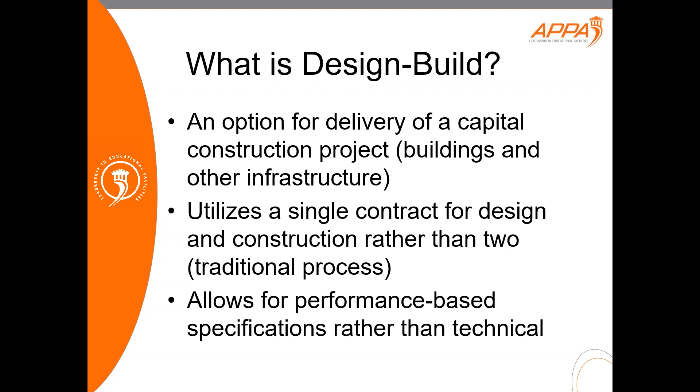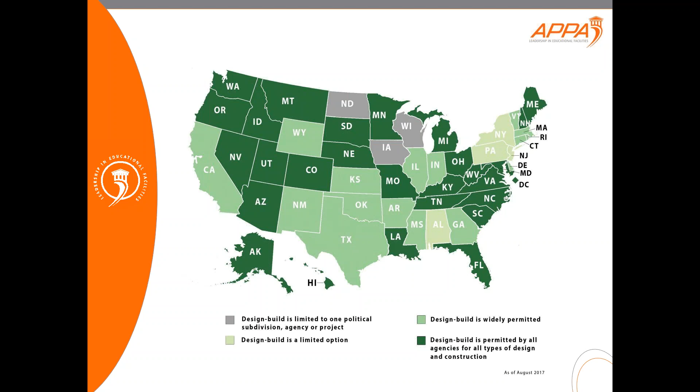And as the color green gets darker, use of design build to construct a project at your campus becomes better. If you're at a private institution, it doesn't matter what these colors are. You can do whatever you feel like doing because you're a private entity. But for public entities, you need to be somewhat aware of what your state allows you to do for contracting.

So the first question: how many project delivery methods do you think there are? I've mentioned design, bid, build already, which is the traditional method where the owner hires an architect or engineer to design something, and then they take the final design and bid it out to a group of contractors. Or, if it's a private entity, they may go to a favorite contractor, or they may negotiate the price. Then a contract is signed with the contractor to construct the facility that has been previously designed.

A variation on that is construction management agency. You may still have a separate designer, and in this case, you hire a construction manager who would then be in charge of finding contractors or subcontractors to construct the designed facility. In some cases the construction manager participates during the design phase, but that's not a requirement.

A variation on that is construction management at risk. Again, the construction manager may be involved during the design stage and have some input in the design, but there's still a separate contract with the construction manager. When they're at risk, they have a little bit more responsibility for making sure the project gets done the right way, very similar to design-bid-build. The project is designed completely by the designer, and then the construction manager takes over and constructs the facility.

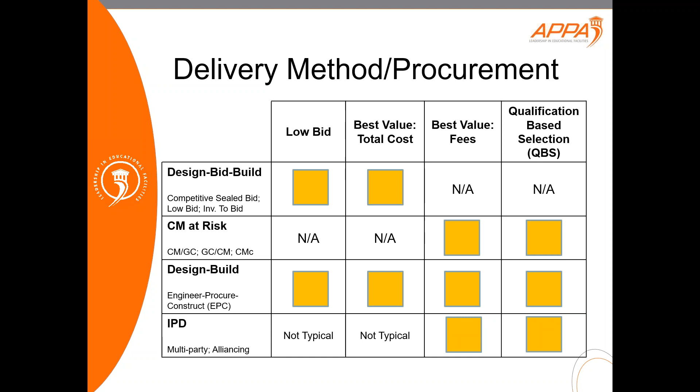So again, there's low bid, and that's where the cost of the facility counts 100%.

There's best value, where we weight things somewhere between 0 and 100% for a number of different factors, and you choose the design build team based on some kind of weighting criteria.

Then there's best value fees, where you again choose the design build team, or if you're doing construction management instead, you choose the construction manager based on their fees.

And lastly, qualification-based selection, where you're ignoring price and looking mostly at qualifications of the team—the best designer for a science building versus a classroom building or a dormitory, or the qualifications of the contractor to deliver the project on time for you.

Now let's look at time. We can consider the time to construct the facility as being very important.

Back in the 80s, when interest rates were very high, it became a big deal how long it took to get the project designed and constructed. In those days, maybe even the 70s, folks probably recall seeing something about Paul Volcker dying earlier this week—he was the one who drove interest rates up over 20%, even for houses.

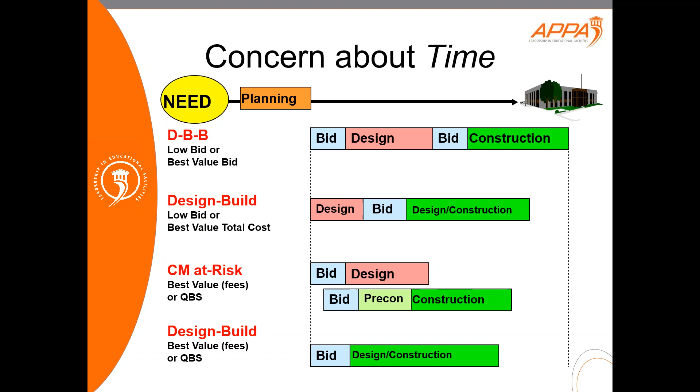So which one should you be choosing? Well, it's not quite as easy as throwing a dart to see which of these four options gets selected. Let's look at a couple things first.

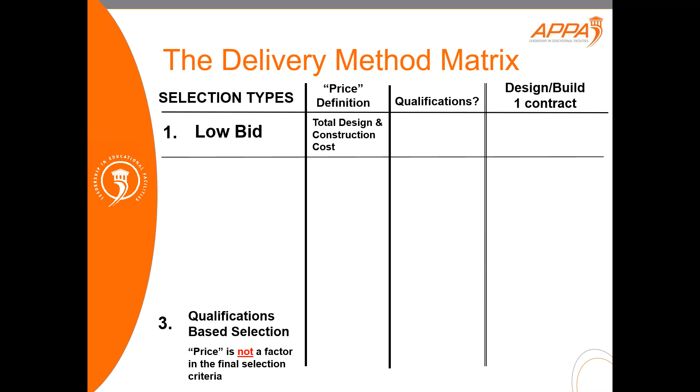First, with low bid, we want to identify the total cost for the design and construction of the facility. Do qualifications matter? No, they don't. So we will then select a low bid design build project delivery method as a result.

Alternatively, if we're looking solely at the qualifications of the design build team, we don't worry about the price. We're willing to pay the price because we've chosen the team based on qualifications. Qualifications are the most important, so we follow a design build qualification-based selection method. Now, a lot of times it's too painful for a board of trustees or governors to allow you to pick the most qualified firm. They want to know they're getting the best price also.

They want high value, but they want it cheap, so to speak. So we have a couple of variations in between, where we have some kind of competitive sealed bid price, and we have a proposal that we select to give us the best value. We can break this down into two forms, Form A and B, where price and other criteria are used to select the design build team.

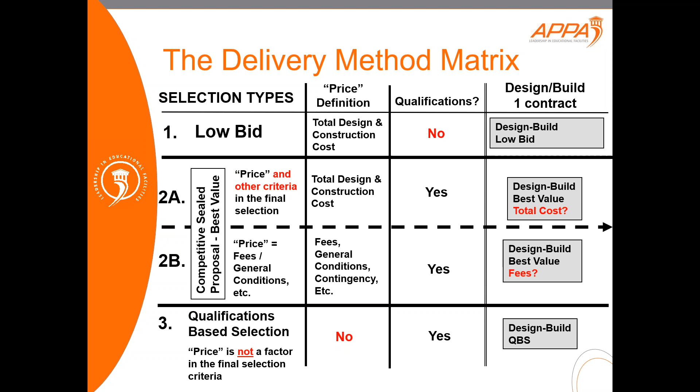So in the 2A version, we're looking at best value but total cost. And in 2B, we're looking at best value based on the fees. What does all of this mean overall?

The Design Build Institute of America has commissioned some research from Penn State University, and the most recent numbers I have here are from 2004. I think there's a more recent version, but this will do for now. The researchers discovered that on cost per square foot, if you just go to a contractor and say build me this design, the numbers run 14% higher. Whereas if you pick the contractor based on qualifications, they were 50%, or rather 4% higher.

In the case of choosing based on best value, it was 50% higher. And in the case of just low bid, obviously that would have been the lowest price. I'm not going to go through all the other details in this chart, other than to say you're looking at a number of different things: the unit cost per square foot, whether the cost will grow due to change orders or unforeseen conditions, whether the project is faster or slower than others, and the delivery speed, which includes not just construction time but planning and design time also.

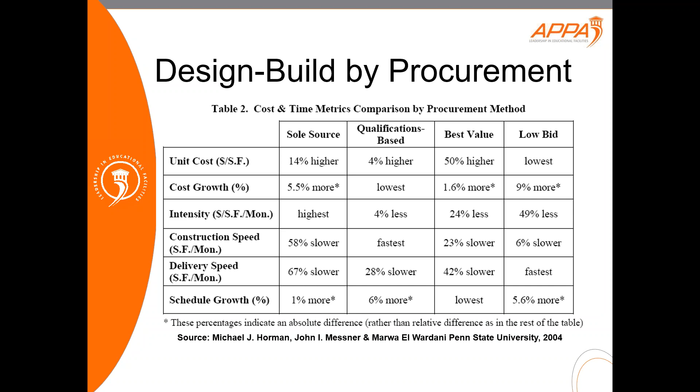And then what does the schedule look like? You certainly want the project, particularly something like a dormitory, to open in August so students can move in for the semester. You don't want to pick somebody who has a record of delivering a project late. You want it delivered on time, if not early. So this bottom one is very important. You want to see the lowest schedule growth as possible.

So what are the major differences between traditional project delivery methods, design-bid-build, compared to design build? I've already mentioned some of these. In the traditional method, there are two contracts: one between the owner and the designer, and another between the owner and the builder. That puts the owner in the middle whenever there's a question about the design, about details, or what's going on. So the owner is really stuck in the middle of that arrangement.

In design build, there's just one contract. If there's a question about the design, the owner may be brought in to discuss it, but the design build team is responsible to resolve it on their own. And if they've already given you a price, you don't have to worry about seeing a change order because they've already dealt with the price for you.

In a traditional delivery method, the owner guarantees the design accuracy to the builder. This may be a bit of a surprise to you, but if you pay close attention to almost any set of standard design-bid-build documents, you'll see that the owner has guaranteed the accuracy of the plans and specifications to the low bid contractor, so they can give you a guaranteed low bid price based on the accuracy of your documents.

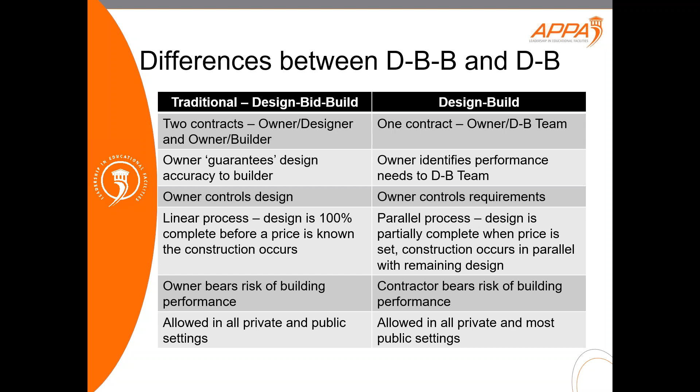So the advantages of design build are that it minimizes disputes between the builder and the designer. There's one contract - that's great, you only have one contract to worry about. It can go faster as a result, because the design team and the construction team can be working in parallel, just in different parts or different phases of the building.

In design build, the builder can talk about constructability issues with the designer during the design portion. They can identify ways of getting the project done more conveniently, faster, and in many cases the owner is there to hear about that stuff and may be approving it. It's also possible for the subcontractors to have a voice in what's going on, and you can even get your own staff involved.

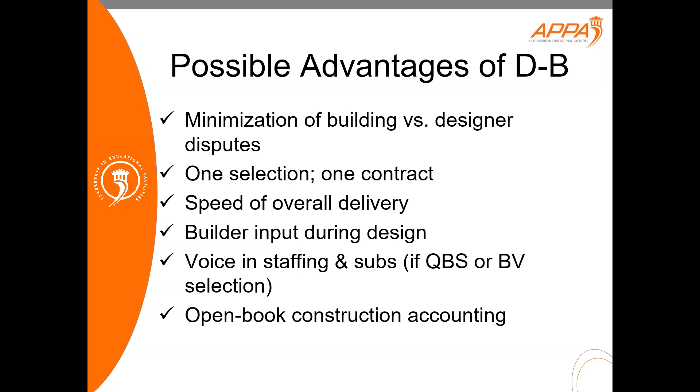And then it is also possible with design build to have a completely open book. Again, this varies depending on the details of the contract, but you can see exactly what's going on with where the money is being spent - is it being spent on the windows, or on the carpeting, or on something else that's more important for you? Whereas if you choose a design bid build method and the contractor is giving you a low price, you don't see the details of where the money is really being spent. That's the contractor's business, and they won't share it with you.

So what do you get out of the differences between design build and design bid build? Well, one of the things you get with design build is the added creativity of not just the designer but of the contractor. And if you've done a good job selecting a contractor, you've got one that has done a number of similar projects before, and they're giving you some great ideas. The owner also gets the assurance that your performance goals will be met.

And that can be very important depending on the project you're working on. You can get your project done faster, from when the design starts until you can walk in the front door, and you get fewer problems with constructability, which usually means fewer change orders. The contractor has to deal with those things - you don't ever see a change order in some cases. Of course, if you're going to get something, you have to give up something, and in the case of design build, the designer is frequently a consultant to the builder.

That's in large part because the builder or contractor has the ability to get a performance bond and insurance to get your project constructed much more easily than the designer, who usually only has about 5 to 10% of the value of the project in their scope of work. So the designer sometimes plays second fiddle to the contractor. You give up some control in the design details or some materials and equipment because the contractor has given you a price, and if you haven't identified what you want in advance in your performance requirements, you may not get those things.

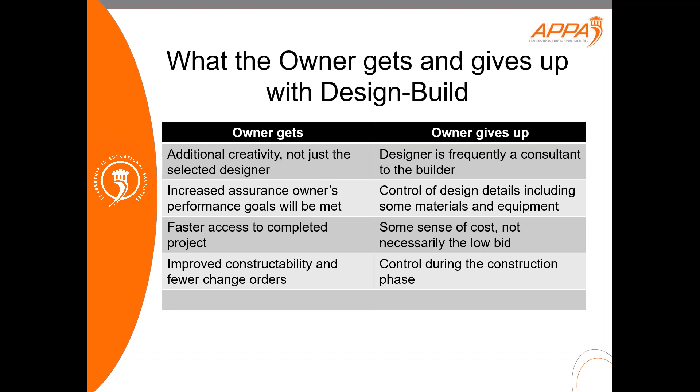There's some sense of the cost being better, but not always. It's because you're picking the design build team based on their qualifications, their ability to get the job done and get it done quickly for you. So you may give up a little bit in cost, and then you don't have a whole lot of control during the construction phase. But you've already picked your contractor based on their ability to get things done.

You have some loss of control over the design. Issues of color, that's not a big deal, those are pretty much zero cost. But exactly how wide corridors are, the contractor will give you what's required by code, but they won't necessarily give you a really wide corridor, as an example.

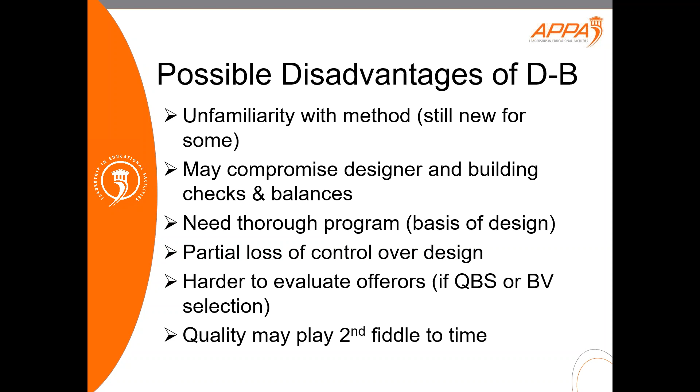It's somewhat harder to evaluate between different firms. If you've never done design build before, you may find it advantageous to have a consultant help you with the design build process so you can weigh the difference between the different variations of best value selection. And again, sometimes quality may play second fiddle due to your focus on getting things done faster. Of course, you can always balance those two out. You can say, well, I'm willing to have the project go a little bit slower so that I can spend my money more wisely on good quality.

You're somewhere between 5 and 25% of the design being done. You can also hire a separate designer if you're interested in controlling what the project looks like. That designer develops bridging documents that you then take to interested design build teams and have them find ways of making improvements in the design, but also getting the job done for you quickly.

This is a very popular method in a public setting, in a public institution. This does mean that you end up having two contracts. You have a contract with your bridging designer, the firm that gets the design to, let's say, the schematic design stage, maybe a little bit beyond, and then you take your project out on the street to firms and get a qualification-based selection designer and contractor on board, where they identify a price for you and get you your project in the time frame that you want also.

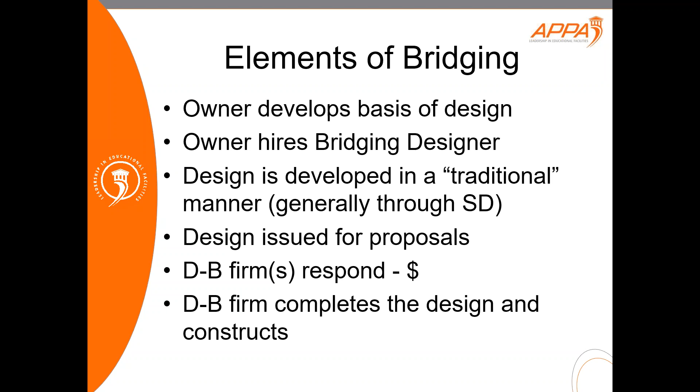Elements of bridging, and this is important for all of you public owners out there, the owner has to have some basis of design. You hire the bridging designer. They develop the project using a traditional method, spending a lot of time with the client, generally taking the project through schematic design. And then you issue that design for proposals from design build firms. Those firms will then respond with recommended changes in the design and or a price. And someplace in there, the price is settled, but the design isn't 100% done yet. The design build firm is selected, and then they complete the design and construct the project.

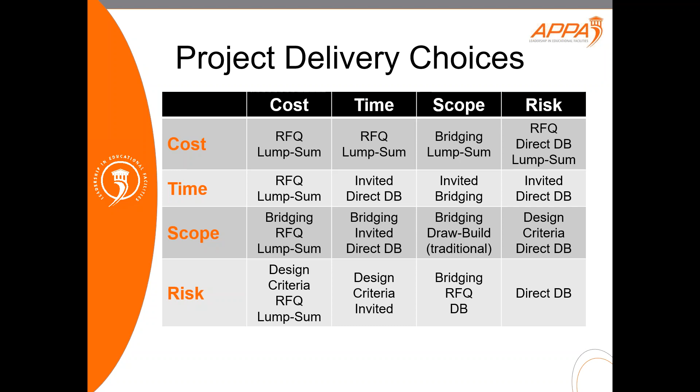Overall, balancing out cost, time, and scope of the project, you can focus solely on cost, where you get a request for qualifications and you have a lump sum price. Or you can focus on time and cost with a similar contract all the way down to the bottom right corner, where your only concern is the risk of cost escalation, risk of the project working the way you want it to work. In that case, you spend time focusing on your performance expectations and select a design build team overall.

The owner has to pay close attention to how they really want to manage the job. In some cases, you really have to change your thinking from focusing on the design to focusing on the function. That can be a challenge for many folks at your campus because they're more accustomed to focusing on the design, but it allows you to focus your attention on the details of the function and the performance of the facility, how you really want it to work.

Then you get to delegate the design details to the design build team and commit to the decisions when the design build team comes to you saying, do you want style A or style B? Do you want this piece of equipment or that piece of equipment? You need to make those decisions in a reasonable time frame and then commit to them throughout the project. But overall, the design build delivery method is a great way of getting projects done on your campus.

I've done design build projects at numerous institutions and have helped other universities develop the process at their institution. It allows you to control the design to a reasonable amount. It allows you to have discipline and responsiveness in changes. You take advantage of time cost trade-offs, and you get a completed building that performs the way you want for the price you are willing to pay.

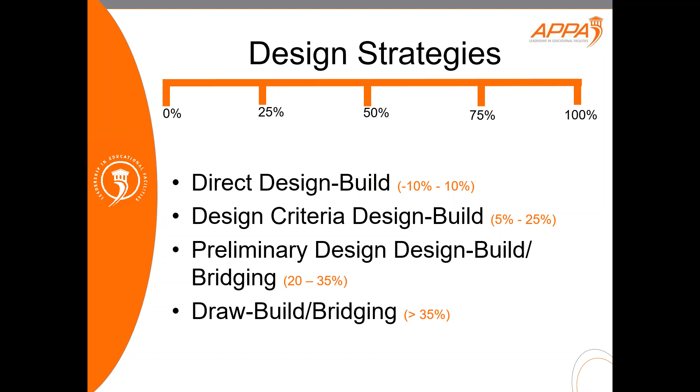Okay, thank you. How does this process change when you get involved in a P3? A P3 is a public-private partnership. You could use any project delivery method at all in a public-private partnership, but that's something that would be defined in the P3 agreement.

Usually when you get a private entity involved in your project, they're going to be leaning more toward design build, simply because they have skin in the game as well, and they're trying to get a project that's done economically and quickly so they can start seeing the income from their P3 agreement with you. But when you write it the right way, your concern is the condition of the facility, let's say 50 years from now. So you want to make sure your P3 agreement addresses the condition of the facility at some time in the future when the P3 agreement has reached its termination.

Okay, thank you. Should there be a provision if substitutions are being used in the design build?